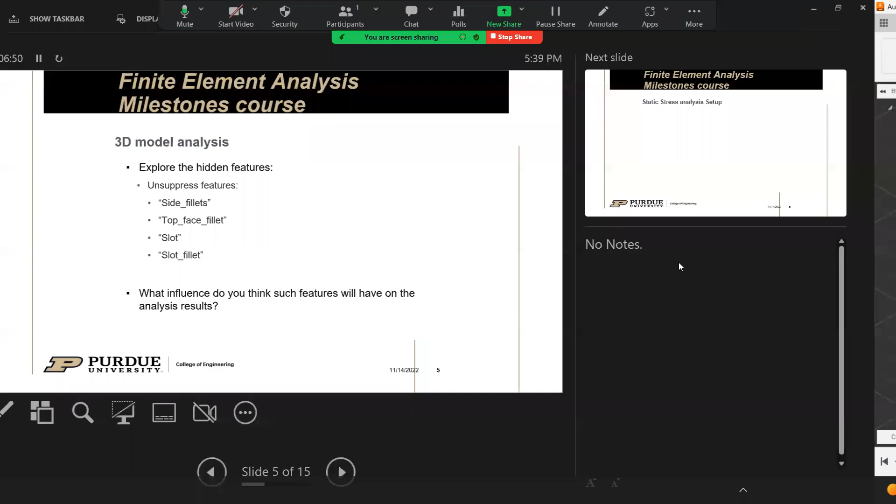Okay, so what influence do you guys say? Well, obviously by unsuppressing those features—if you guys see here, one of them actually gets rid of material from the center here.

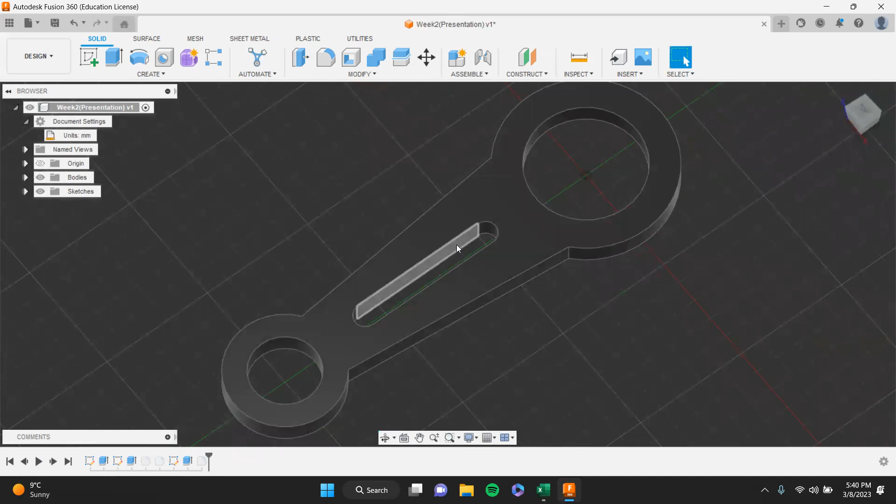You can see it actually negatively extruded from the part, and that's because, as we will see, this part alone has a very high safety factor—really high, to the point where Fusion is like, hey, you don't need this much material, you don't need this to be completely filled. We could have a hole and save some material, save cost in turn, and the part would work just fine for what it's supposed to do.

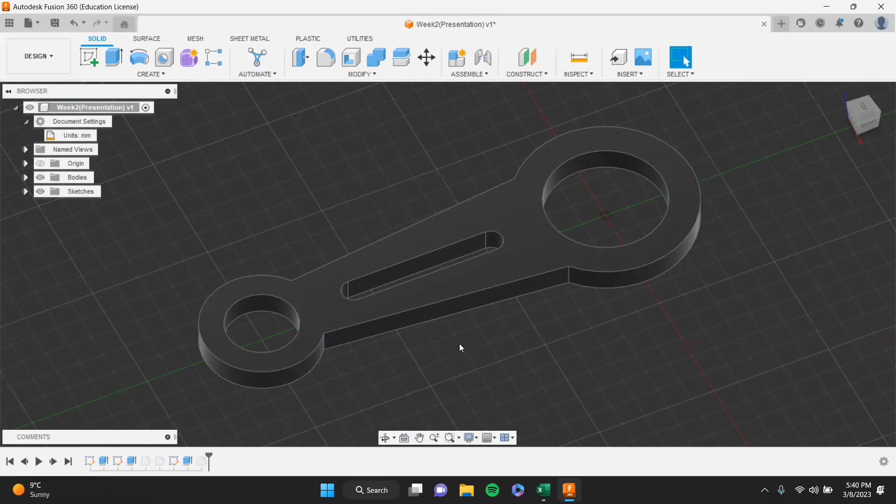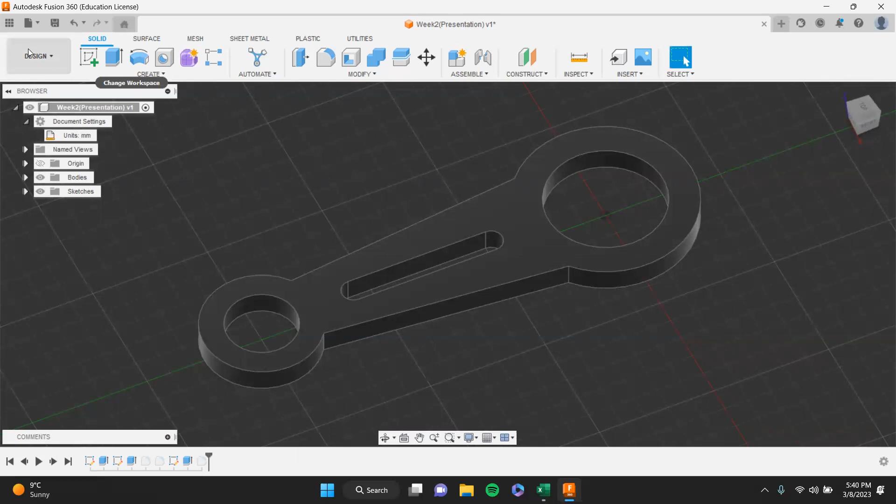That's the main purpose. So now that we have our part, we're actually gonna start with FEA. It's exciting now. First thing we want to do is switch from design to simulation. So when you guys are using Fusion for CAD, you're always on design here. In FEA, we don't really touch on design.

We go down here to simulation, and you can see a color gradient close to what Bernardo presented last week. Click on that—so again, it's just up here, design, and over here, simulation. Click on that.

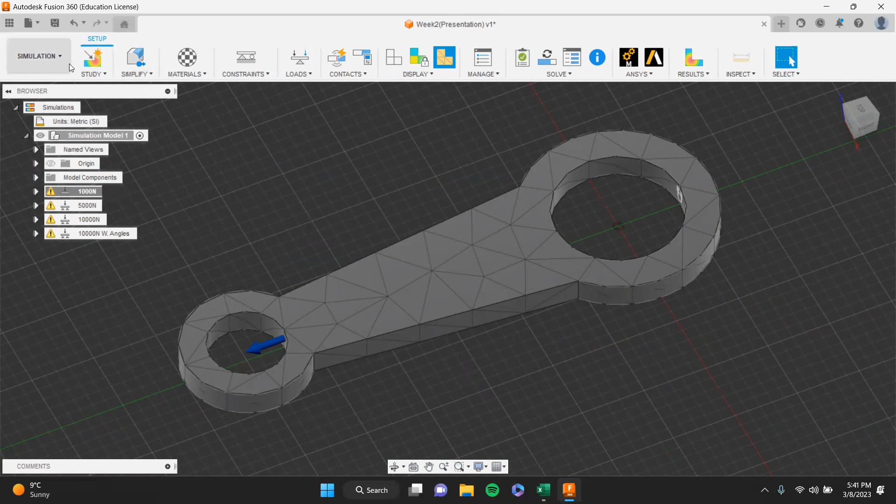Don't mind the warnings here, but you guys should see not this screen actually. Let's just create a new study. You guys would see something like that.

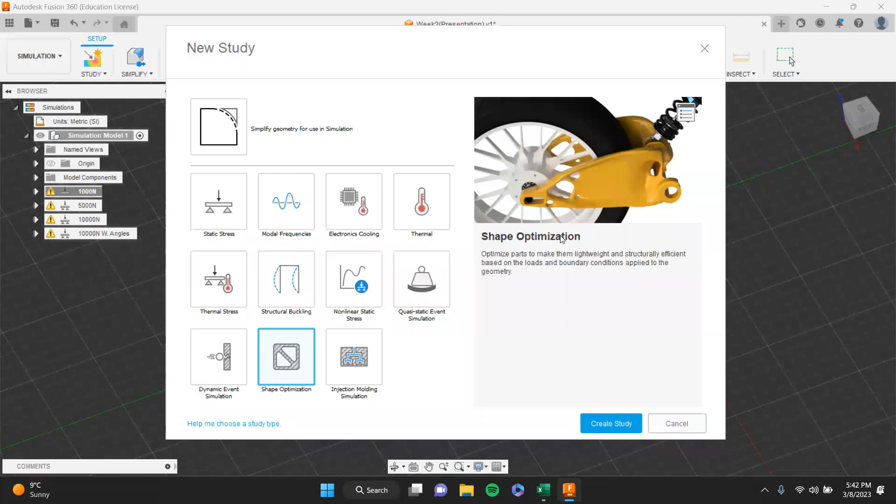So for this FEA course, we are just going to be focusing on simplify, static stress, and shape optimization. But simplify and shape optimization we're going to start later in the weeks. You guys can see there's a lot of different ones, but we're not going to touch on any of these. The basic one is static stress. Basically, if you know how to set up a static stress analysis, you guys are on a good track to set up other types of studies here.

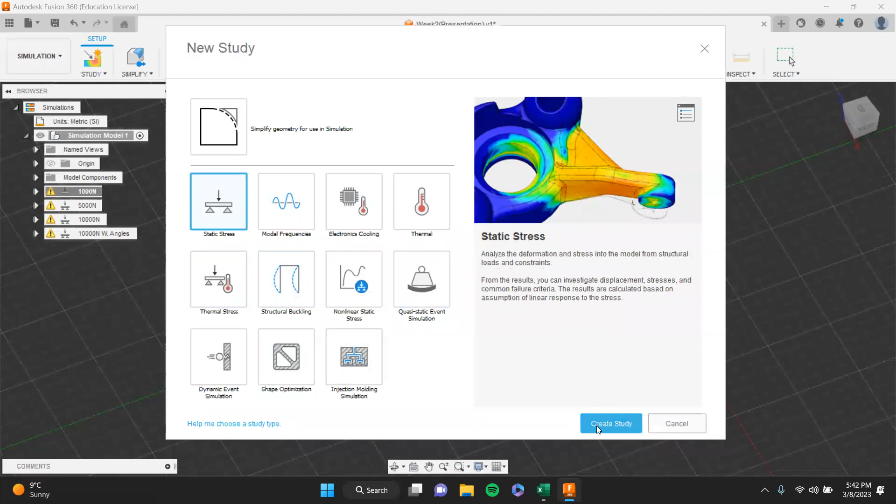So we're gonna create a static stress here. Click on that. Yes. Thank you. All right, we're gonna go back here.

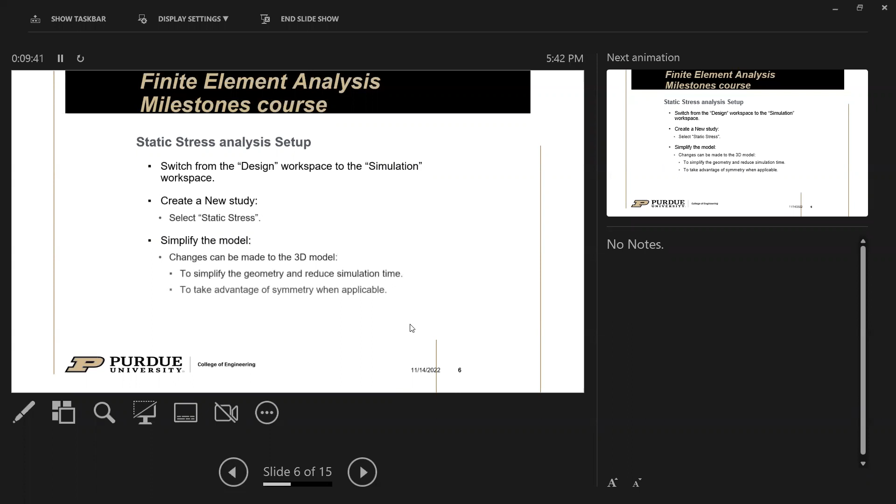This is what I told you guys, this is what the simplify does. So I'm gonna go back here. Here you guys can see simplify right next to the study. I'm just gonna explore that for now. You guys can see a very similar sort of screen to what you would have when you're in design here.

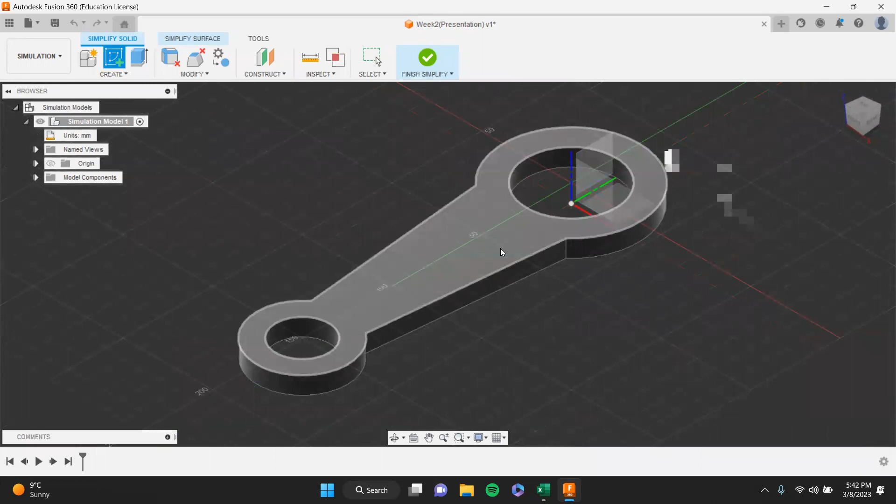So I'm just gonna try something out here. I'm just gonna create, say, a rectangle down here. Just finish sketch and extrude that negatively. So now we have a hole here.

One thing to note about simplify is that when you finish simplifying here and go back to your design, this is not gonna be there. This hole is not gonna be on your original design. Its main purpose is just for you to edit your part a bit and change up your simulation or study, so I'm not actually gonna do that.

Okay, we're back here. So it's just to temporarily modify your model. And when you guys go back to your design tab here, you're not gonna see the change.

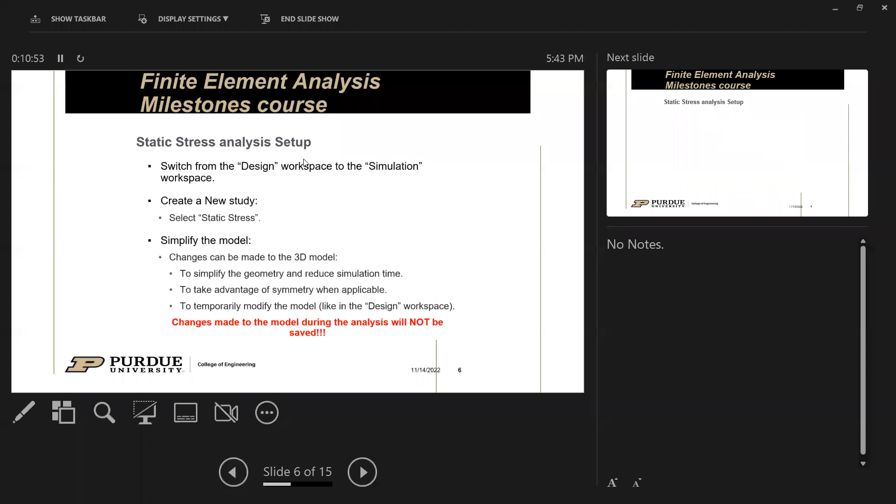So next, the next thing we'd like to do usually when creating a study is to apply our materials. To do that, we go to the study material section. Right now you're at same as model, now we'd like to change that. So I'm going to show you guys how to do that.

First, just drop down here. We'll need to go to study materials here again. So yeah, you'll be here, click that arrow, you'll see study materials. Two ways you can edit it: through the pencil here, or you guys just right click study materials, and you guys see same as model.

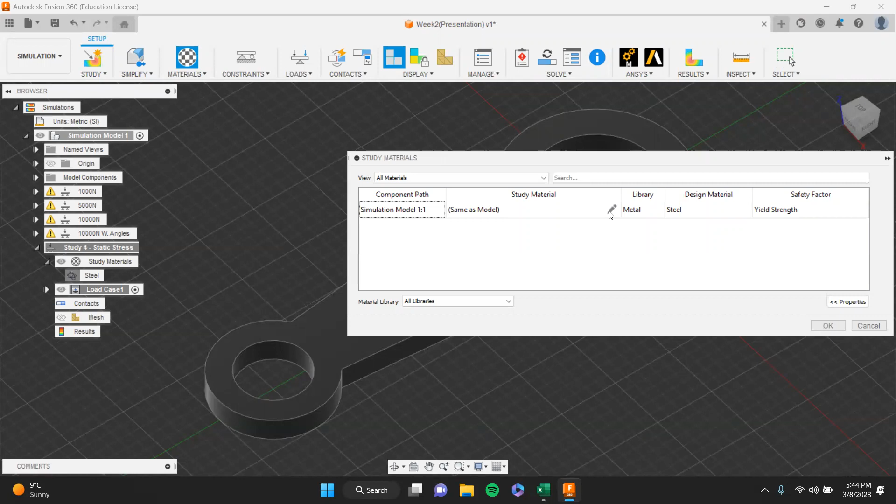For our studies, we'd like you guys to change it to aluminum. Sorry, I have a bunch of them, I was trying out how to create custom materials, so don't mind that. But you guys should have one aluminum, just pick that and click OK. And now your study material should be set. You guys have any questions up until now?

Cool, all right, I'm gonna go back. Next thing is your safety factor. So this includes a lot of engineering properties that I don't really... I mean, it's important, don't get me wrong. Let's just not. Give me a sec, I forgot how to get here.

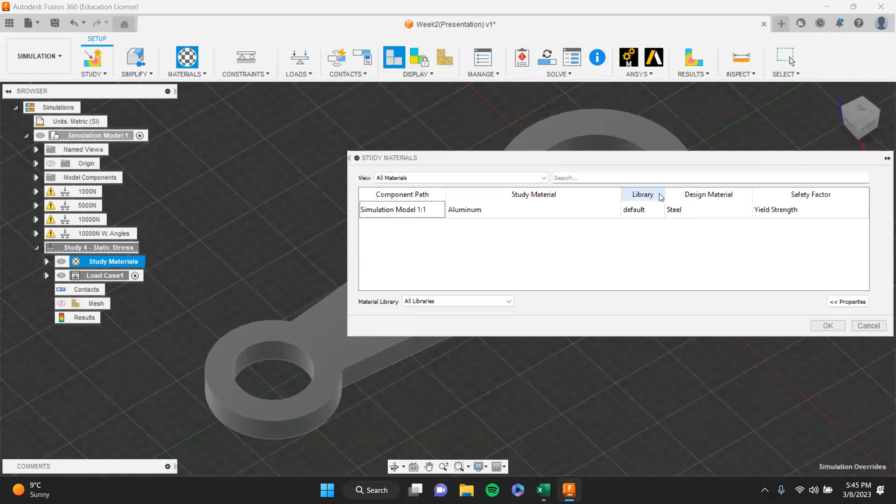It's in study materials. Yes, here, yeah, okay, here. Nice, yeah, so that's how you look at your different properties for the materials you pick. We're not really gonna take any of these into account. All we know is we're gonna use aluminum, so that's all you guys need to know. Once you guys are done with that, let's move on.

So the next step of creating a static stress analysis is to apply your constraints. Because at this point, what Fusion sees is this part is floating in space. Let's take this grid out, it's just floating in space. Fusion doesn't know what to do with it, so we tell Fusion what to do.

First thing is constraints, up here is the constraints tab, and we click, there's a lot of different ones. Just gonna go the basic one, you can just click on that. And we're gonna use a fixed constraint. There's a lot of different ones you could pick from, but we're just gonna use fixed because it's the most simple one.

And we are going to fix this inner hole here. So what this is telling Fusion, you can see I have all three axes selected. This is telling Fusion I want this inner hole to be fixed with respect to the X, Y, and Z axis. I don't want this inner hole to move at all. That gives the foundation for our static stress analysis. So I'm going to hit OK there.

I'm just going to hide the origin. So far, everybody good? Yeah? Cool.

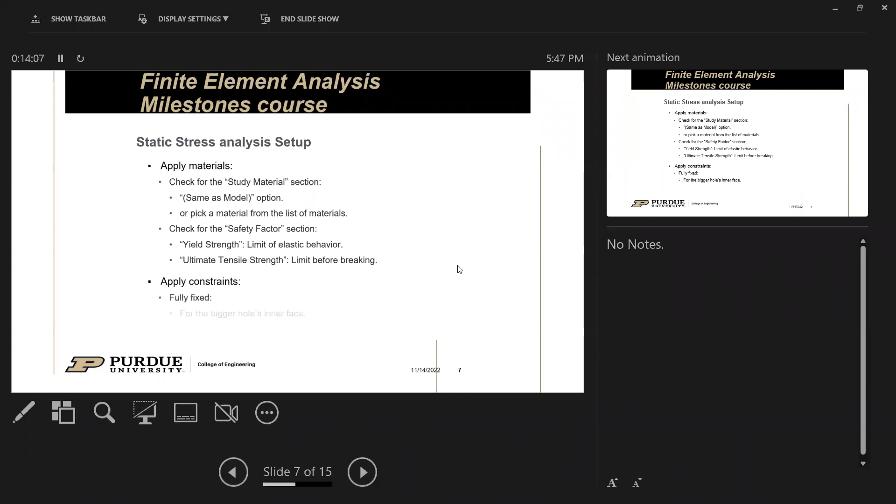Alright, so next thing you want to do usually is apply your loads to your models. And for this one, we are going to apply a force load. So select the structural load, and then select force from the drop down. You want to select the inner face of the smaller hole.

And it's a lot of different things, so I'm just going to go through this first. We're going to edit our angle, our direction type, and we're going to set a magnitude. So I'm going to sort of give you guys a demonstration on how to do that.

Now that we've made our constraints, next thing we want to do is your loads, which is up here, right next to constraints. Click on that. So again, on the drop down, there's a lot of different loads you guys can pick. We are going to stick with force for this one.

Now it's asking us for a target. Earlier, we constrained our inner, like our big hole. Now we're going to apply our load on our smaller hole here, right here. Now you don't want to click here or here. Click on the face, the inner face of the hole. Click that. Now there's a lot of different things we could change here.

We could change the angles, change the direction reference with the direction of the arrows, or we could change the magnitude of our force. We want it to be 1,000, so you guys can set it at 1,000 newtons. Oh, where's this not working? There you go, 1,000 newtons.

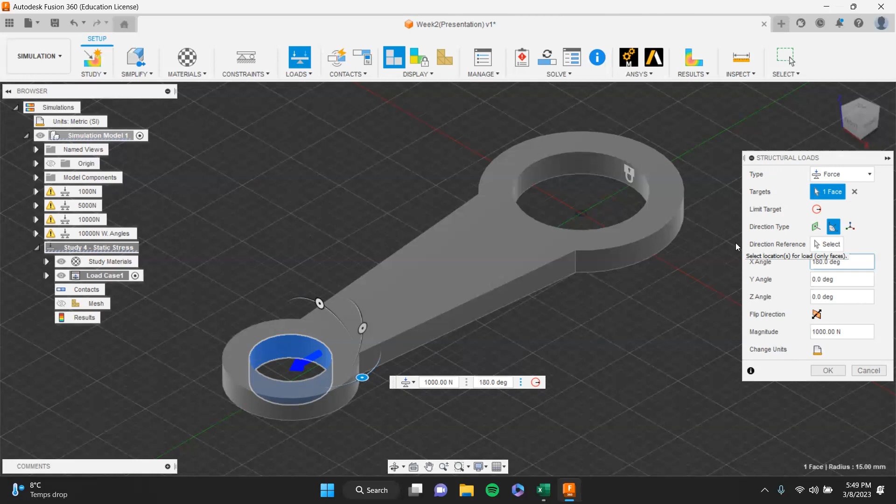Everybody good? Cool, I'm gonna go back here.

So next thing we want to do for FEA static stress analysis is to generate the mesh. So earlier last week, Bernardo talked a bit about meshing, and we're gonna get a lot deeper into it next week. But right now, we are just going to create a very basic mesh here.

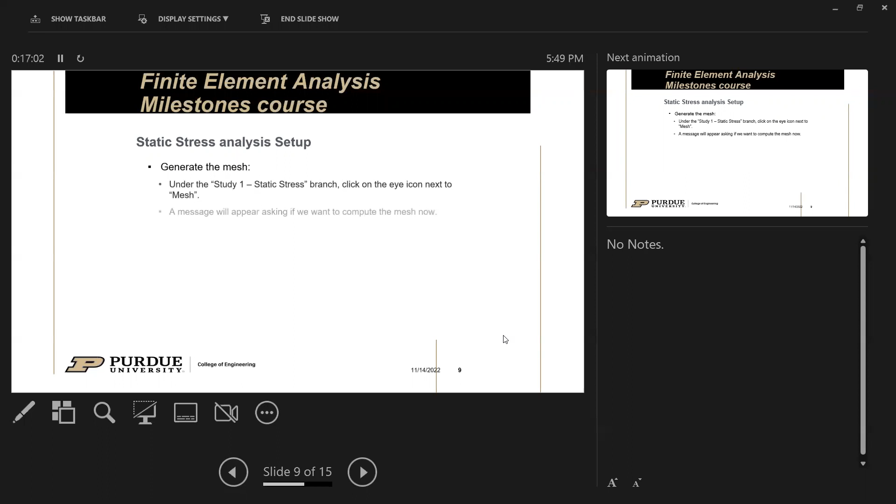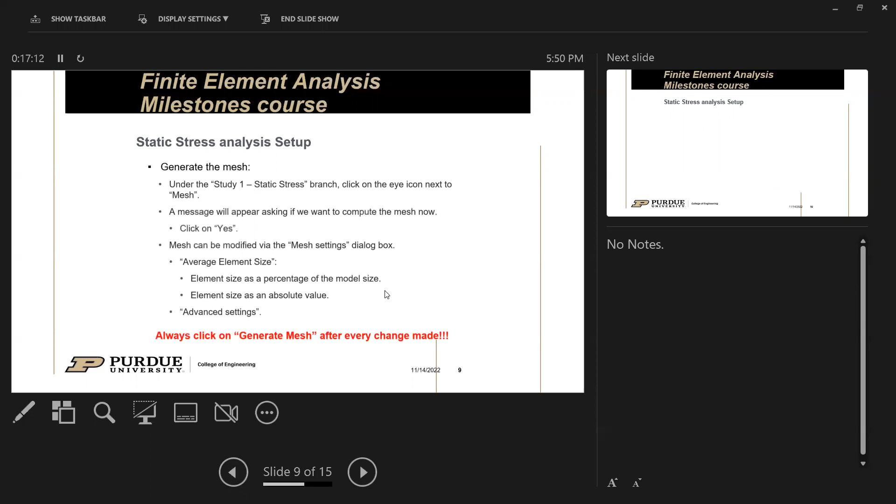And here is sort of a very general step by step on how we can edit the mesh. First we want to go...

Okay, I have a question for you guys. Do you guys prefer if I read it from here and you guys do it yourselves, or if I'm over here and I sort of just talk about how to set things up? The latter one? Cool. All right.

So there's a lot of different ways that you guys can get to your mesh. First one's over here, second one's over here, third one is over here. It's over here at settings. All right, I'm gonna go through each and every one of them.

First one, you could go here in our drop down. So if you guys are seeing this right now, click this arrow, gets you to this drop down, and you should have mesh right here. And then you want to go to edit here. And now you guys are at this mesh page, right?

So we're gonna get a lot deeper into this and what each of them means. But as of right now, I want you guys to make sure you guys are at model base size and at 10%. Now, how do you guys know if you guys are at 10%? You guys just hover over this arrow. If you hover over it long enough, it tells you what percentage you guys are in. So that's the first way.

I'm gonna hit X here. Next, another way you guys can do things is, sorry, you go to settings.

At settings here, below general is mesh, and it's exactly the same interface we saw earlier. Doesn't really matter how you guys get to this mesh setting, as long as you know how to get there, you're fine. So go here, click OK. That's one way you guys can do it.

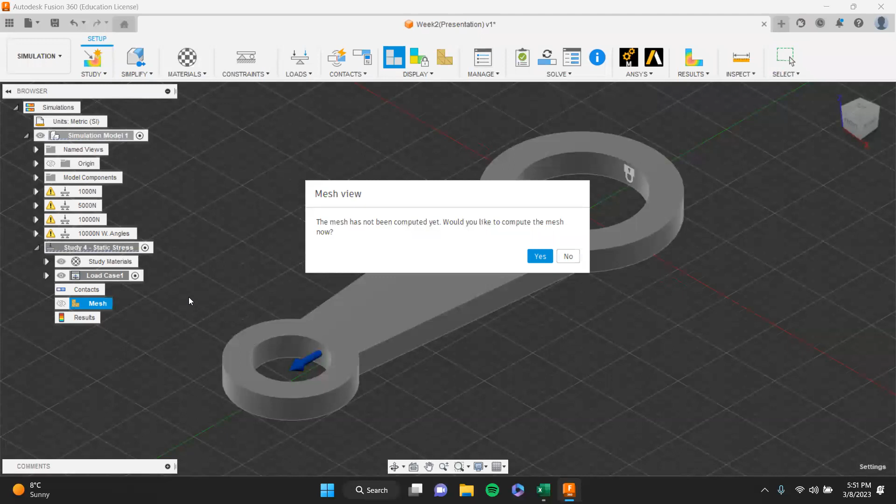Another way, if you don't really care about your mesh, you can hit this eye, toggle this eye, and it's gonna tell you it hasn't been computed yet. Just hit yes, and Fusion's gonna put like a generally rough, simple mesh. So this is what it looks like. Is this what everyone is seeing right now?

Cool. So we're gonna go next.

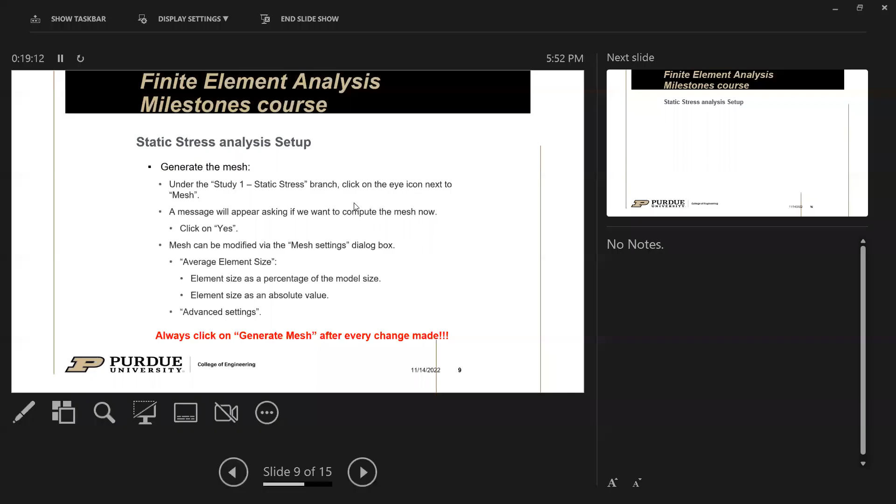One thing I want to mention is Fusion has a tool that can help you guys out a lot in seeing whether or not you set up your studies right, and that's called the pre-check tool. Basically, when you set things up right, you'll see a green check there. If you set things wrong, you'll see a red error, and I'm going to show you what that looks like. The pre-check button is right next to solve, right next to settings over here.

And if I click this now, you guys can see, from here, we can already see it's green. There's a check here. I've set everything up. Fusion's telling me, all right, we're ready to solve, but I'm just going to delete something here.

See, if I take that constraint out, Fusion's not very happy with me now. It's telling me, hey, I don't understand what you want me to do. Yes, there's a load, but there's nothing fixing it to the ground. If I apply that load, our model's just gonna move along with it. So that's basically what Fusion is telling us.

And depending on what you forgot, Fusion will give you a different warning. So I'm just gonna apply that constraint back here. There you go, Fusion's like, all right, you're ready.

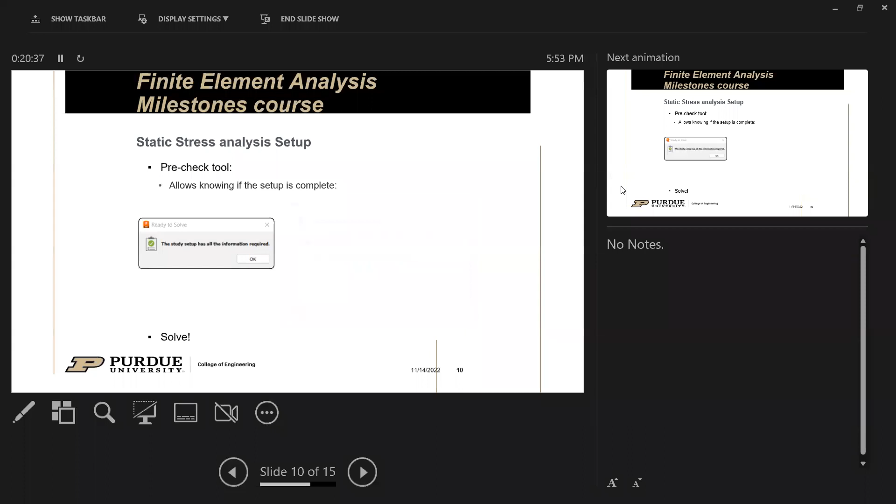So that's that. Okay, so now we're going to actually get into solving our model. Right next to pre-check is the solve. You click on that and click on your study.

You guys shouldn't be seeing any of the other ones. Just you guys should be seeing something like this. And you just hit solve one study like that.

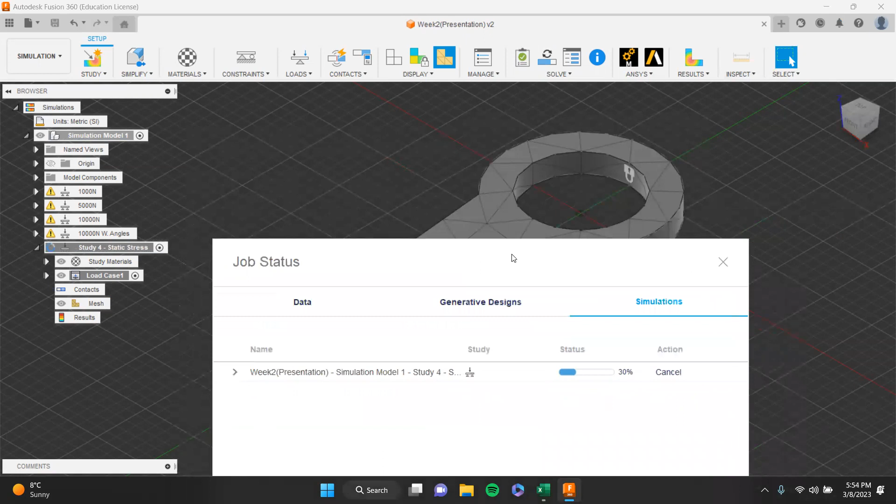And it could take like 2 to however many minutes you might need Fusion to run the study. In the coming weeks, we'll realize that the speed at which Fusion solves these is completely based on your mesh. Right now we have a generally rough mesh, so it shouldn't take Fusion that long. But as we get to smaller and more defined meshes, Fusion will take a lot longer to solve the studies, but we don't have to worry about that for now.

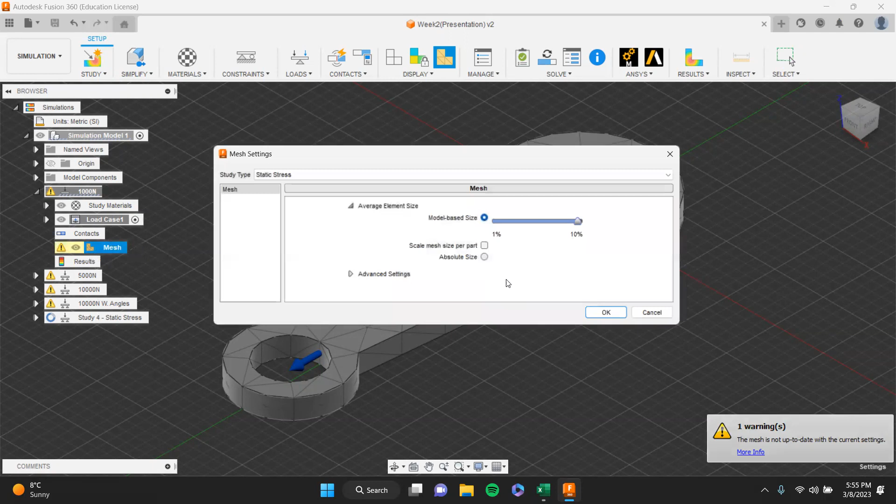Yes. After pre-check, once you're done with your mesh, give me a sec, I'm just gonna update my mesh here. Cool.

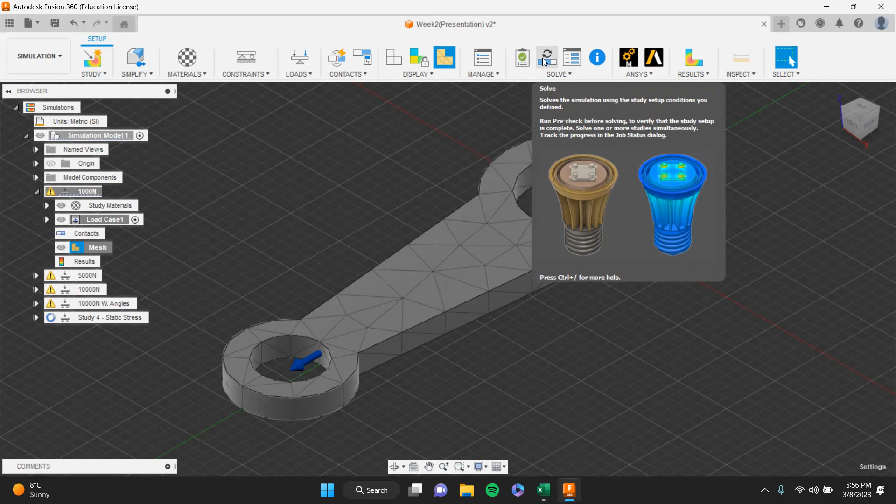After pre-check, yeah, so when you have a green already, if you see that your pre-check's a green tick mark here, that means you're all set for the next step of the FEA analysis, which is to actually solve this study. So that's exactly what we did earlier. We hit solve and we just solved it.

Another way you guys can get to solve is through here, simulations. You can right click and there should be solve down here. But that's hidden, right? I mean, this is way bigger, it's way easier. It has solve right under it, so that's probably the easier way to do things. Just go here and hit solve.

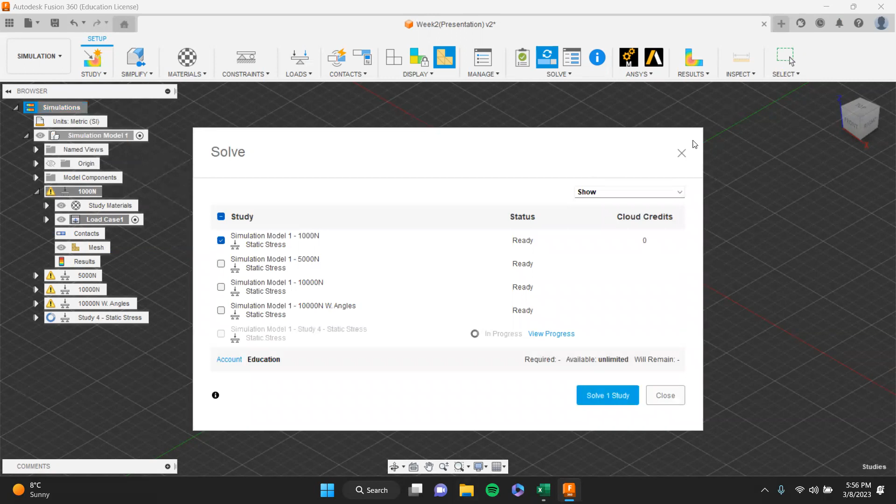But yeah, by this point, it's a waiting game, just waiting for your studies to finish. So I'm gonna go back here.

One more thing while we're waiting, we can change the names of our studies by double clicking here. I'm just gonna call it 1000N again.

All right, so as you will see, once your study is done, the status will show complete and you'll see a results detail here. First thing you guys will see is... let me make this bigger actually, because... cool, yeah, a lot better.

First thing we have is the safety factor. So there it says actual minimum safety factor of 15.

Now earlier last week, Bernardo talked about how in industry they usually look for a safety factor of 1.5. A safety factor below 1 means that whatever stress or force you're applying on your model, if you actually did that in real life, your model's going to break. So a safety factor of 1.5 means your model can sustain whatever stress or force you're applying on it.

Next thing is Fusion has some recommendations. Very general recommendations, but nevertheless good ones.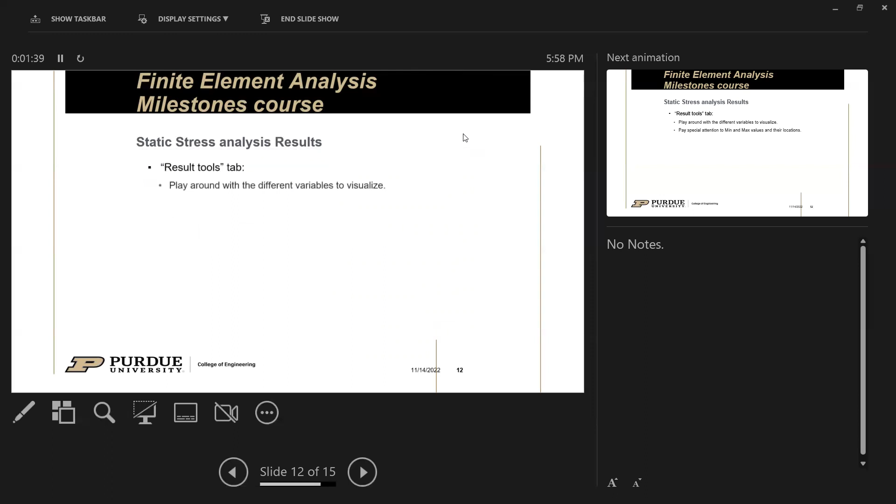All right, um, yeah, so once it's done, I'm just gonna go over these slides, and once the study's done running, I'm gonna go back to Fusion and show you guys what exactly each of these are saying.

Okay, so yes, that is all. So once your study is actually done running, there's a lot of things you could do with it. First things first is you guys can choose what you want to visualize.

There's a lot of different factors you can pick from: displacement, safety factor, as well as stress. So you can see how each component is affecting your model.

And the next thing that Fusion allows you to do is observe the deformation of your model as it goes through that stress. There's 3 modes: first is undeformed, which is basically what your model looks like before you apply the stresses on it; second is actual; and third is adjusted.

Now, by default, when these studies are done running, the results you'll see are adjusted. This is just because, say, the study we just did earlier is a force of 1000 newtons, which might not be a lot on our model itself. So the actual displacement could be like times 10 to the negative 4 millimeters.

So it's really small. And if we keep it at actual, we might not be able to see the deformation at all. That's why people usually use adjusted, just to give them an idea of how their model would deform.

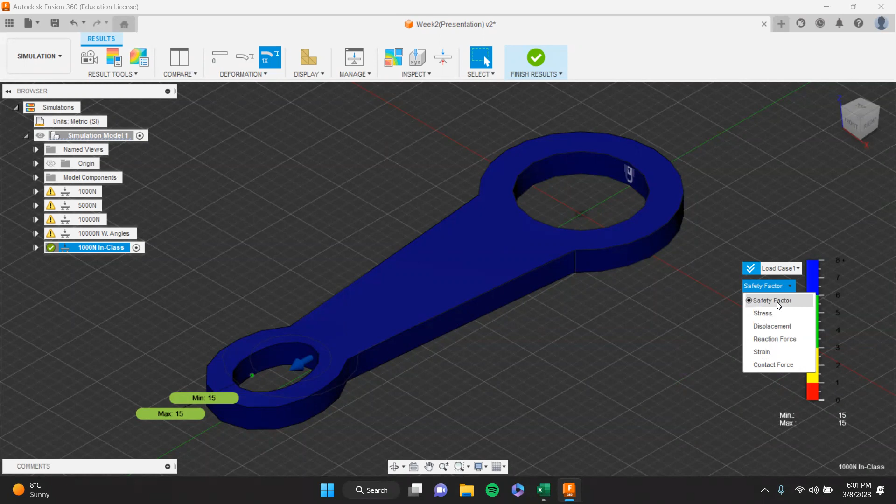And like I mentioned earlier, here's the deformation. We have undeformed, actual, and adjusted. Now, as I mentioned earlier, it defaults to adjusted. As you guys can see, let's go to stress actually. Yeah, that's better.

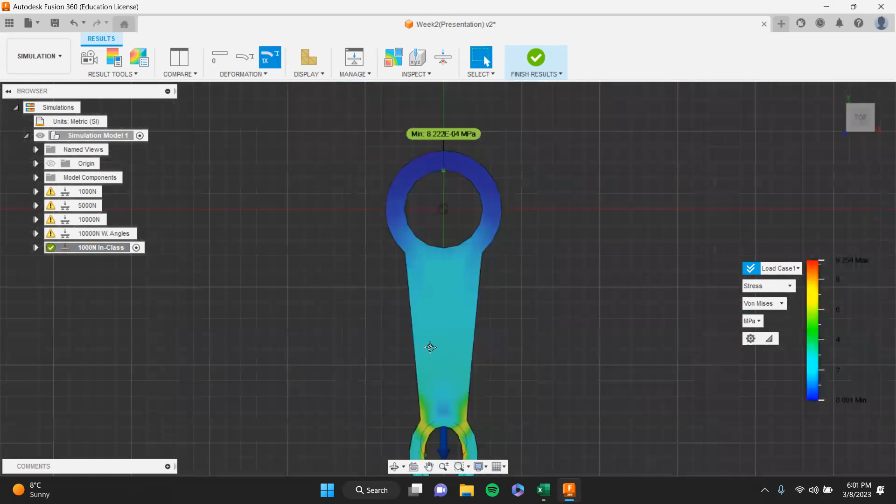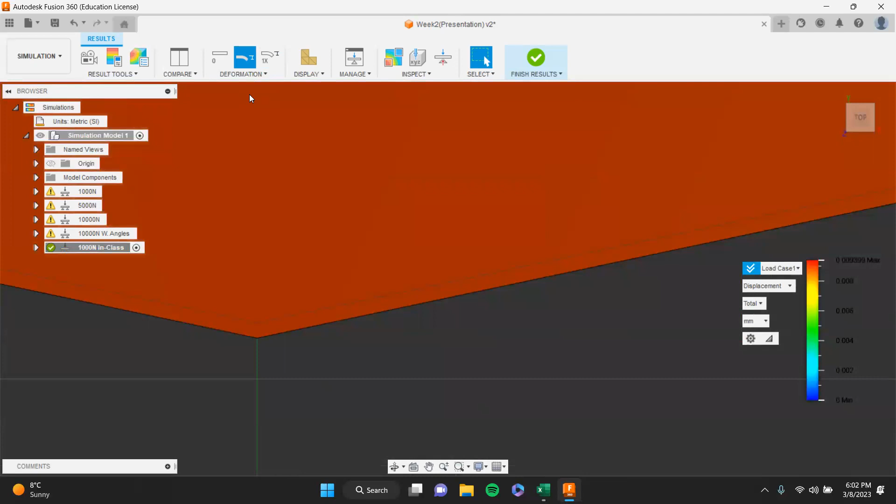It looks like our part actually moved a lot, right? If we go here, we can see it's actually a very small displacement. If we go to actual here, we can barely tell the difference - we have to zoom in a lot. There, that's our displacement. That's why we use adjusted, because honestly we wouldn't be able to tell if we kept it at actual - you wouldn't be able to tell our model is deforming at all. So if we want to get an idea of how our model would deform if we increased the force applied, that's one of the main purposes of adjusted.

Another thing you could do is animate how your model is deforming, which is pretty cool. So yeah, three things: displacement, stress, and safety factor. When you're on stress, by the way, in this course we're going to focus on von Mises stress and keep your units as megapascals.

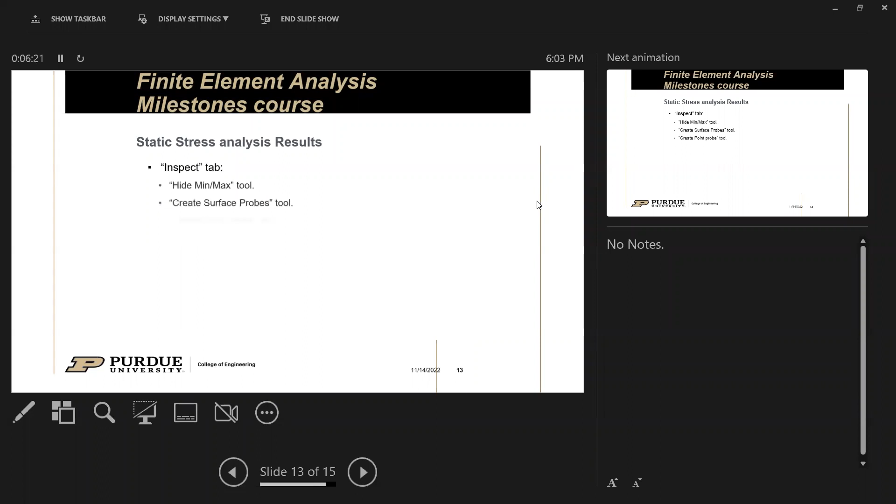So yeah, we're done with that. Next thing we're gonna get to is - oh, I forgot this - yes, okay, this is another thing we could play around with: the inspect. I don't really go through these, but if you guys are tired of looking at these, you can just hide those.

And then if you guys want to look at how a specific point within your part is affected by the stress and how it deforms, you can put a point probe here. And the last one is reactions - I don't really, we're not going to get into that.

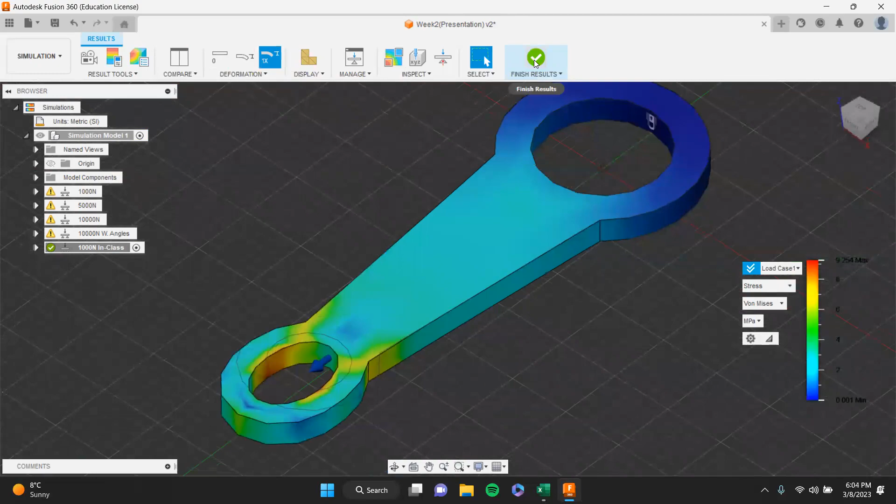What we want you guys to do now is change the values yourselves and make your own studies. So we're gonna create 4 different studies now. If you guys created that 1000 Newton one, that's one study - you just have to make 3 more.

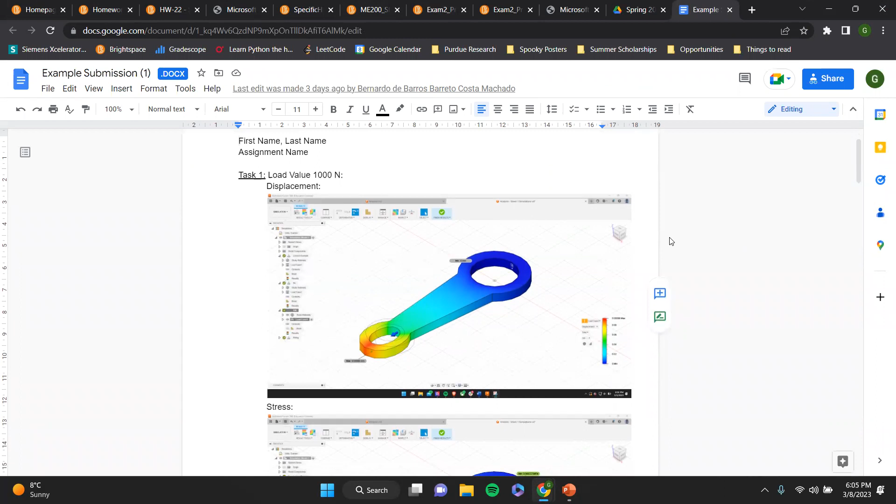A screenshot of your displacement, and we want the entire screen, by the way. So displacement, the stress, and the safety factor - those 3 components. And since you guys are doing 4 studies, we're asking for 12, so 3 from each study.

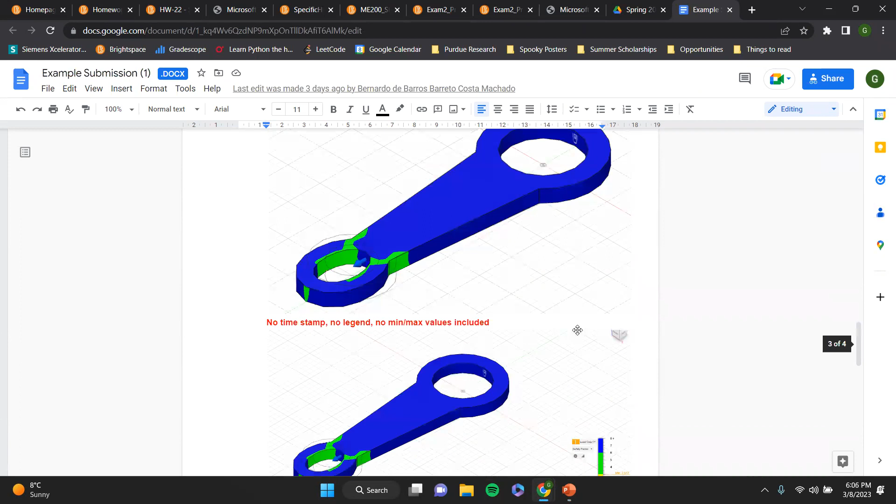Okay, here's some ways we don't want you guys to do it. The issue here is, I mean, you could have asked someone else who took this course to send you the screenshots, which I don't know why anyone would do. But per milestone's instructions, they would like the entire screen where they could see the dates, see the times, and see your entire screen basically. So this is one way we don't want you guys to do it.

So another way we don't want you guys to do it is, again, we'd like to see the minimum and maximum values. So please do not hit that - just show it, don't hide it. We don't mind, we want to see it actually.

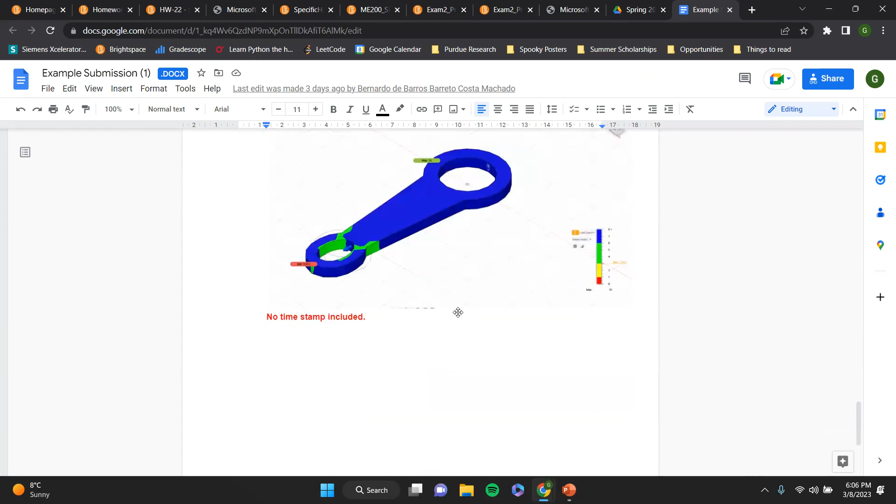And the third one, again, no timestamp. So something crucial is we'd like to see the date and time so we can actually see you guys - you guys are the ones that did it.

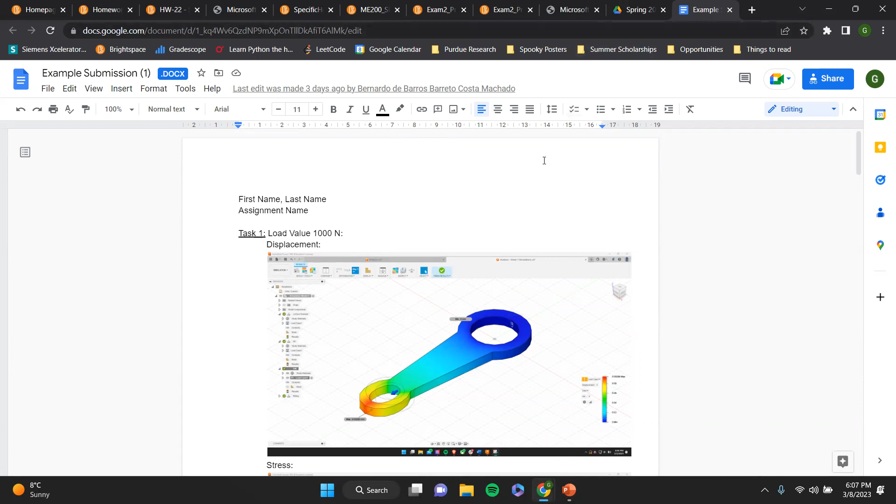The maximum stress value could differ slightly, we're not asking for pinpoint accuracy. The biggest part of this course is we want to see that you guys are able to create your own studies, and show us stress, safety factor, and displacement. That's the biggest target we have within this course.

So yeah, I'm gonna make this full screen so you guys can have a better look.

So if you guys can do that already, you should be in prime condition. The first one we're asking for is the 1000 newtons, which we just did. Second one is 5000 newtons, and third one is 10,000 newtons. Now this fourth one, we're asking you to create a new study, so this is four separate studies. We want you to edit this 10,000 newtons one and add another angle to it.

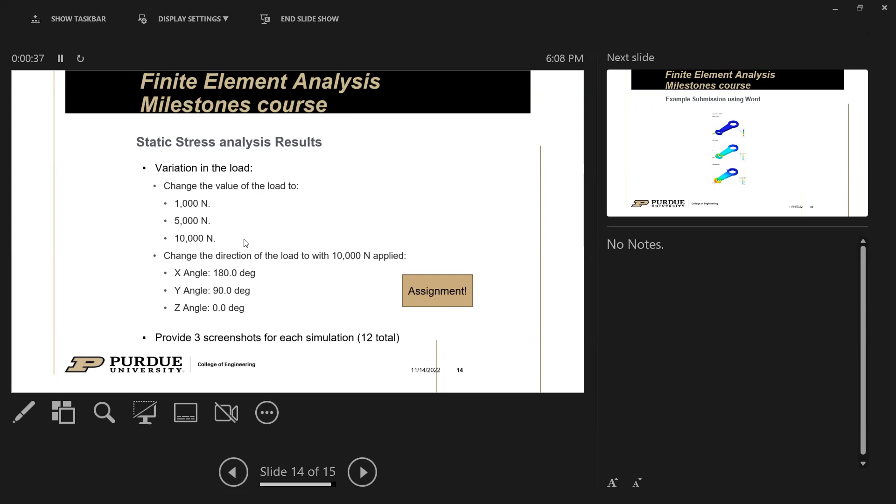This time in the y-axis. So I'm going to show you guys how to do that. Something helpful to you guys is instead of creating a new study, reconstraining it and putting new loads to it, one thing you guys can do is right-clicking here and clone study.

Instead of hitting this and creating a new study and then reconstraining it and adding new loads to it, what you guys can do is right click here and clone study. This makes things a lot quicker because when you clone study here, I'm just gonna close that.

Of course you need to generate your mesh again, but why it's better, I think, personally for me, is because you have your constraint there, and if you just want to edit the magnitude of your load, you guys can do that. So adding 10,000 is as easy as that.

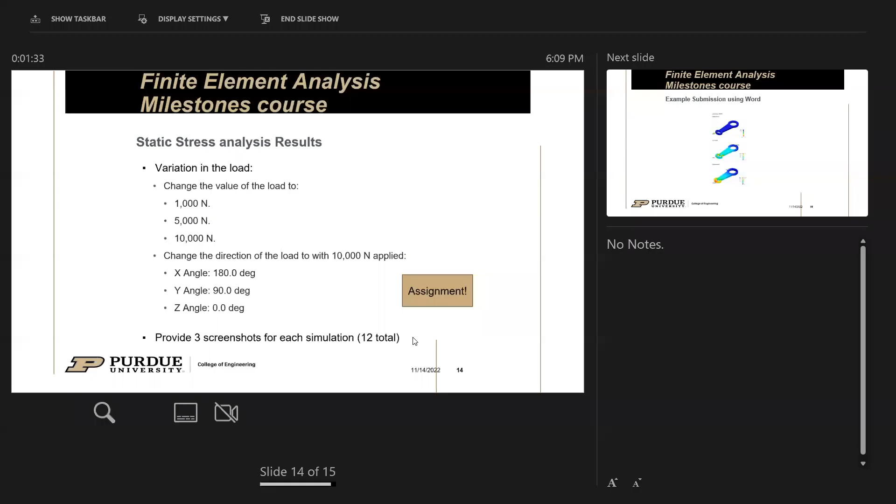Now again, the fourth one asks you to change your angle to 90 degrees. So we just want to change this to 90, which is basically an arrow pointing down, right? Again, Fusion might put your arrows in default in weird conditions, so the main idea is we want your arrow to be pointing down. If you guys have that and you're at like 90 degrees, we don't mind, that's just the main point. We just want it to be pointing down.

So yeah, I'm gonna go through how to create a study one more time, and then you guys should be good. I'll walk around if you guys have any questions.

So you want to hit study here? Oh, let's go from the beginning actually. So we start design here. This is the normal Fusion interface you guys are probably used to. Up here, you go from design down to simulation.

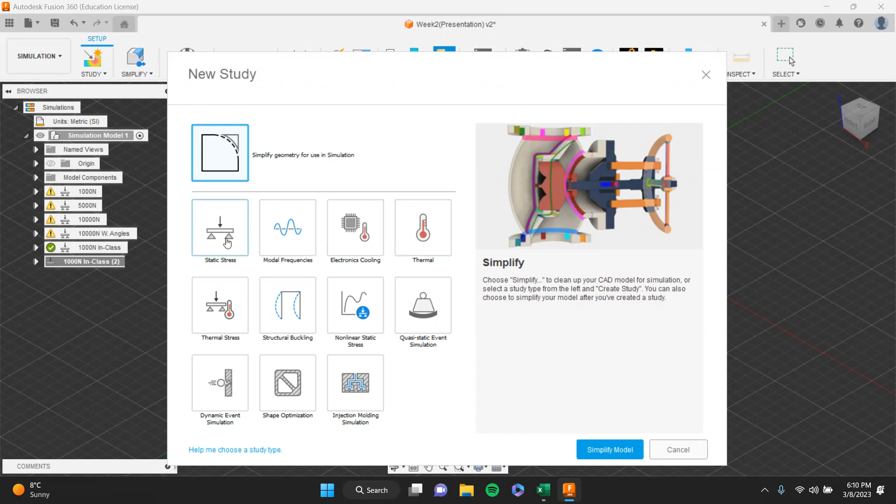And when you're there, you probably won't see the screen you expect. You'll probably see a screen like this asking, all right, welcome to simulation, what do you want to do? For this, we're going to use static stress. You can double click on that or click create study. I simply double clicked earlier. One thing you guys can do again, double click and change your study.

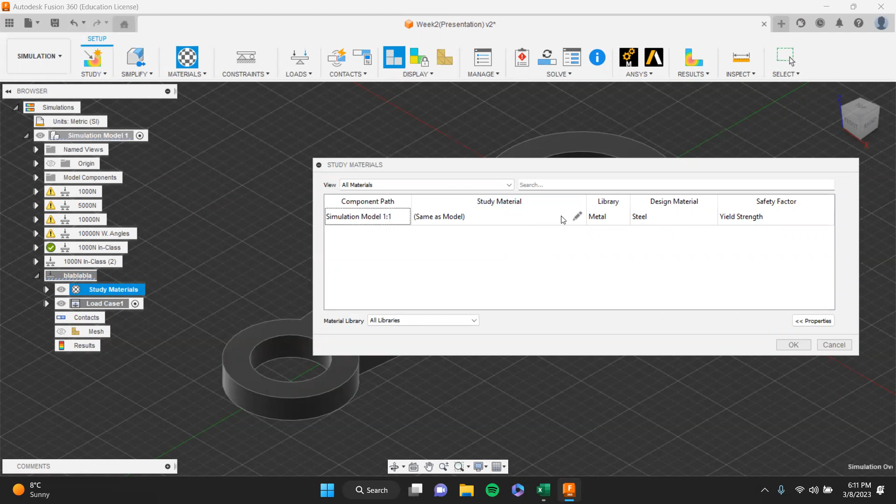And then the first thing you want to do is your materials. By default, it's going to be same as model, which is steel. We actually want to change this now to aluminum, right? That's the material we're going to use for the rest of the course.

Next thing you want to do is add constraints to your model. For this class, we're gonna follow 3 weeks. In the weeks to come, we're gonna have the exact same constraints and loads, so try not to get bored. We want to constrain the inner circle here, the whole of the inner circle, not the edge, but the face inside. You want to make sure that all 3 axes are highlighted and your structural constraint is set at fixed. Once this looks right, you're gonna hit OK, and you guys should see a lock mark here.

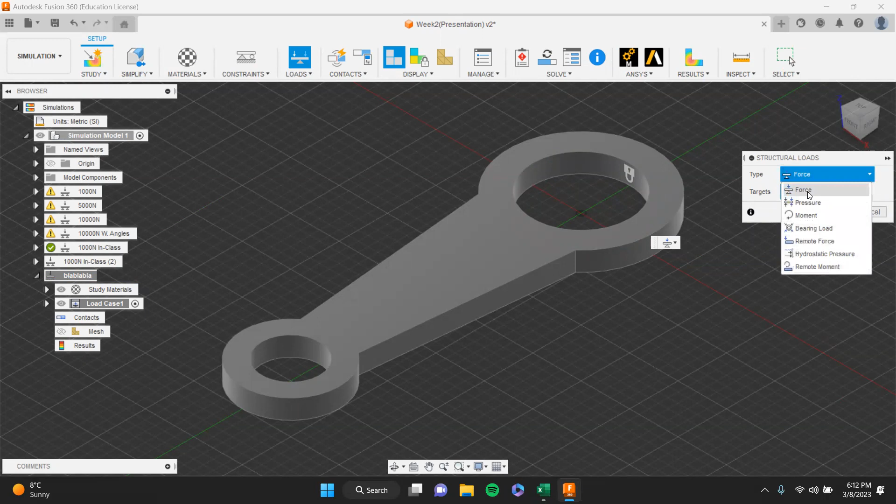That's how you know if you did it right, if there's a lock mark. If you have any axis that's not highlighted, it's gonna be an unlock mark, which is Fusion trying to tell you that our part can still move. A lock mark basically tells us that our model's fixed now. We're ready for the loads, and you guys can find loads right over here on top. Just click on that. There's a lot of different types of loads to go over, but specifically we're going to go with force for this course. We're going to hit the inner face of the smaller circle now.

Again, not the edge, the inner face. Now the arrow's pointing towards the lock, but we wanted to point the other way. Two ways we could do that: edit the angle here to 180, or

you could rotate by dragging on this. Sorry, again, 180. That's good. Or what you could do as well is hit direction, right?

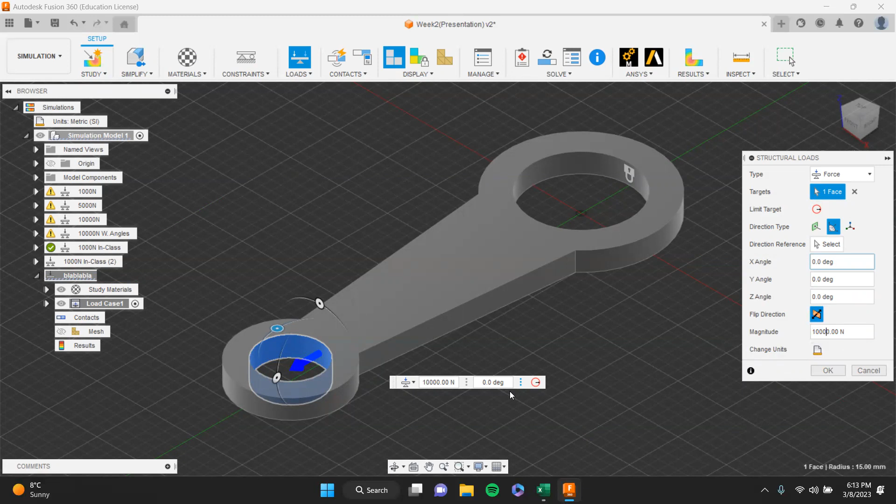Either way works, and then that's how you set up your magnitude. You could input here or here, doesn't really matter. We're gonna hit OK, and then next thing you want to do is generate your mesh.

Again, two different ways. You want to hit the pencil icon here to edit your mesh, or you go up to your settings and go to mesh. Either way is fine. You want to make sure your mesh is a model-based size at 10% for this.

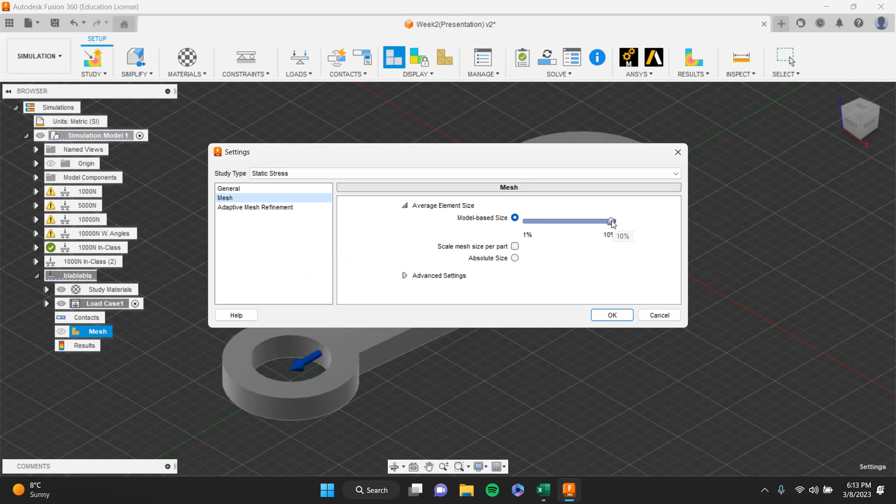I'm gonna hit OK. Once you've done all that, you guys should see a green check here. This is your pre-check telling you you're ready to go. If you guys do not have a green check, you can review in the recording what you did wrong, or if you're here in person, raise your hands. But once you're done with that, you should be ready to go.

Two ways you can solve: hit the solve here. Fusion will automatically select whichever study you're on right now. But I have other studies here, and you could actually select multiple studies to solve simultaneously. We're gonna get to that next week. But you basically hit solve for one study or however many studies, and you wait.

And then once you're done with your studies, this should be the screen that you guys are... Cool, so once your studies are done, this is sort of the screen that you'll be introduced with.

And give me a sec here. There's one thing I want to see. It's not here. Is it here? Nope.

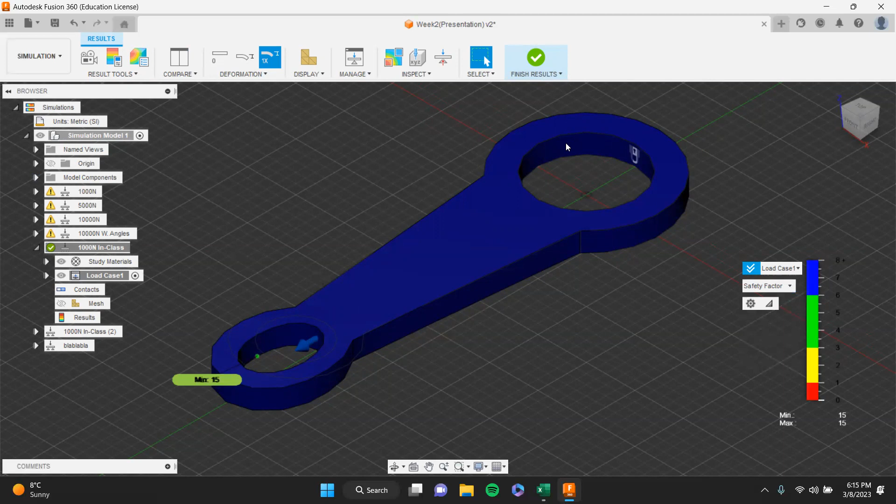But yeah, basically we want you to screenshot this. So this is one good screenshot, the entire screen. Then go down to stress, screenshot, and switch over to displacement. That's 3 screenshots. You have 4 studies, so do that again 3 more times. Compile that in a Word document and submit it to us.

Do you guys have any questions? Yes. Okay, Jordan will be out to help you.

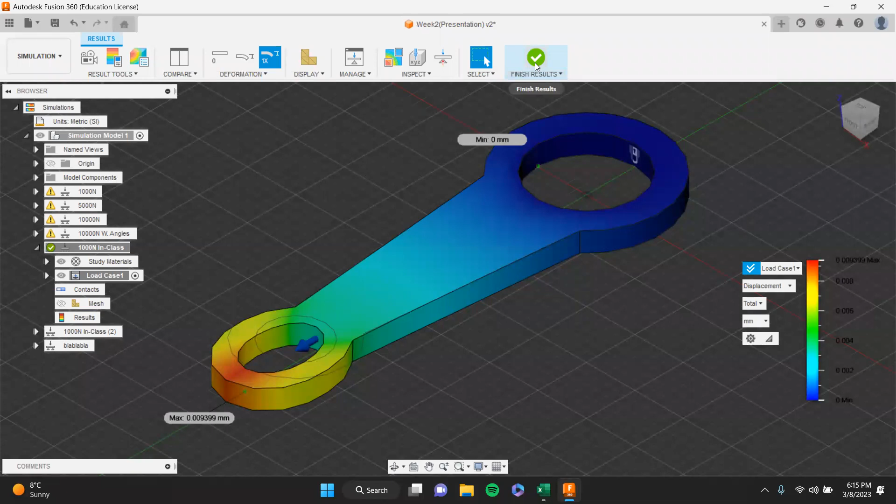Okay, so I'm just gonna go back here, and just let me know if you guys need any help. Sorry.

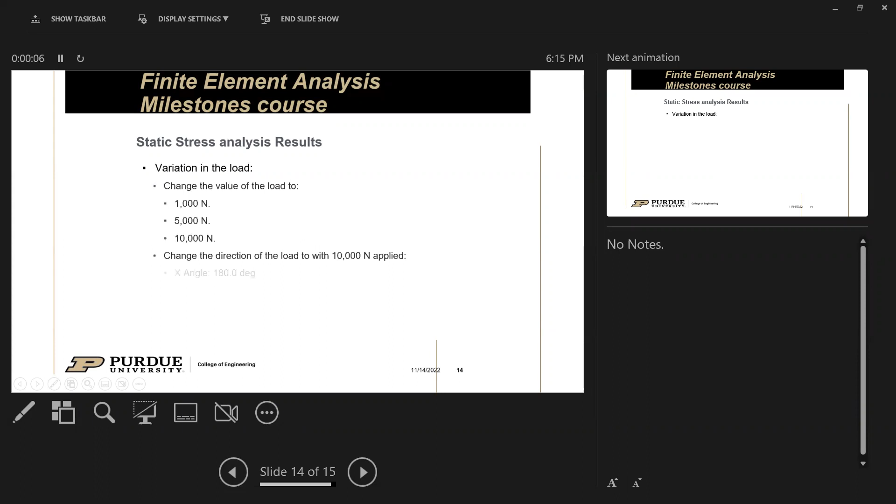Yeah, so again, 1,000 newtons, that's one. 5,000, that's one. 10,000, that's one. And then 10,000 plus the 180-degree angle at the x-axis, that's another one. Total of 4, three screenshots each.

Yes? That's completely up to you guys. It's a lot more simple if it's suppressed, but if you want to try it out for yourselves, we're not stopping you. So it's your choice, basically.

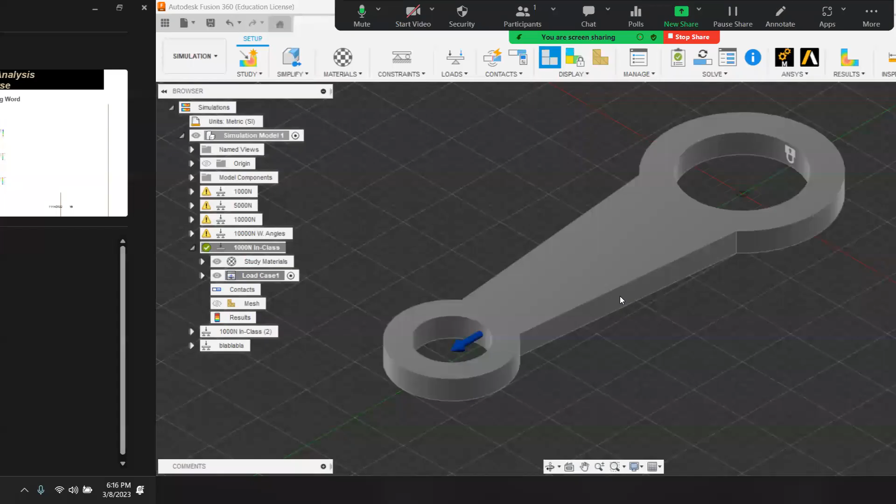Yes. Oh, yeah. Yeah, okay, that should be fine. Um, so let me go back here.

So if you're on simulation right now, I'm sorry, we want you to go back to design. Let me know if you're already on that screen. Yeah, okay, cool. Sorry, I'm gonna keep you over here.

Oh, okay. Yes, did you have a question earlier? Okay. You guys all good? Yes. Yeah.

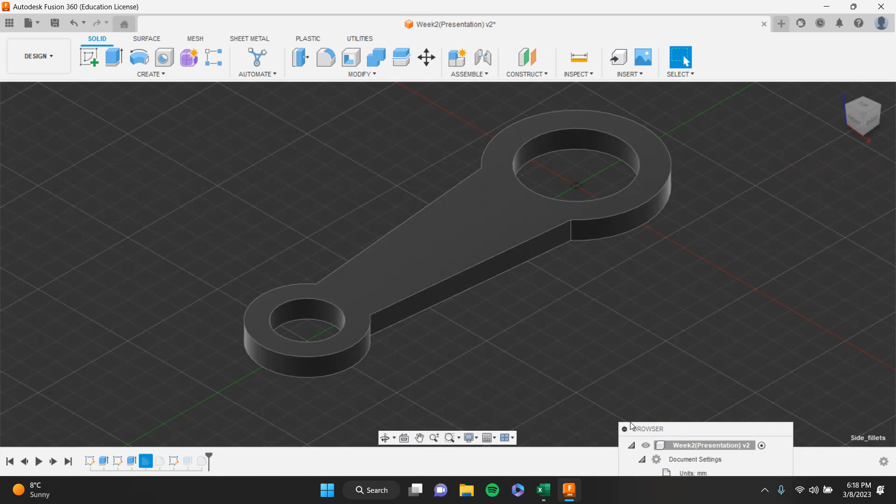Oh yeah, okay, actually let me get a bit more into detail with that, because there's a lot of different errors you guys could get. Sorry, how do I do that?

Yeah, yeah, go back there. Nice, okay, so right now it's at green, right? So we're ready to solve, like we've set our study up, right? One error we could have is by deleting the constraint.

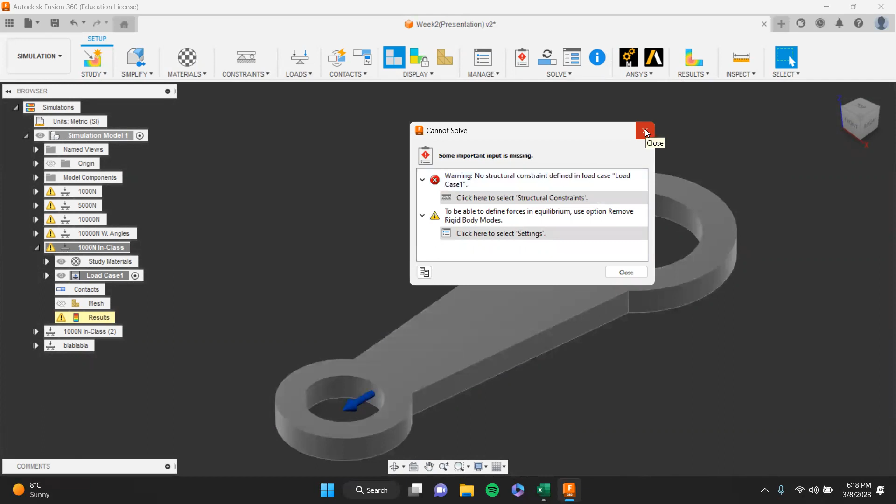And now if we take this grid off, there's nothing holding our model down to the ground. So applying this load that basically pushes it, nothing's gonna happen, right? Our model's just gonna get pushed along and nothing's happening. So that's the first one. Fusion's telling us, hey, there's no structural constraint here, like we can't analyze anything, nothing's gonna happen. Our part's just gonna move. So that's the first one.

Second one is if we delete this. How do I delete this? Make this 0.

So if you guys want to delete your loads, it's over here. I'm gonna suppress it—this is another type of error you guys can get. So there's no load. Fusion's telling us like, yes, our part's fixed to the ground now, but nothing's happening to it again, so there's nothing to analyze here.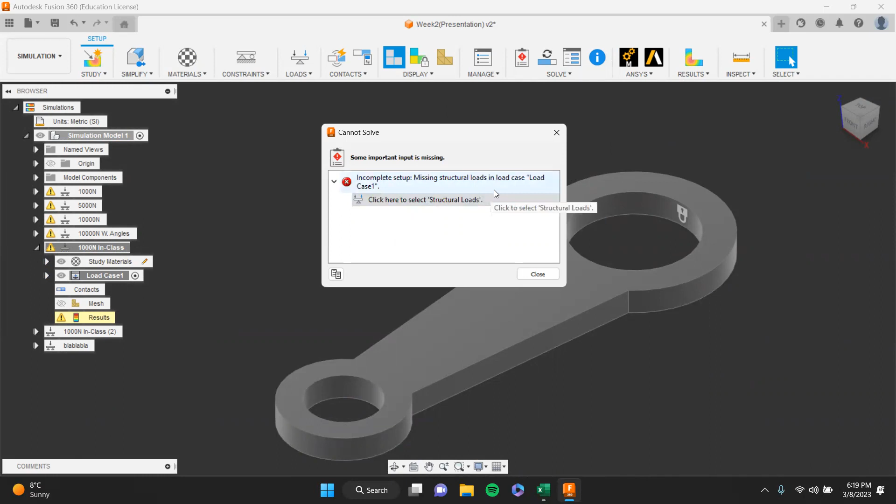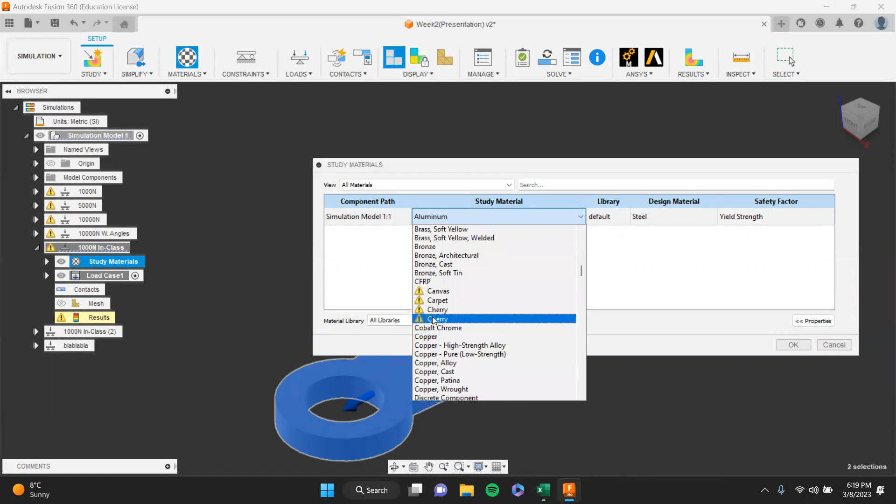Another type of error you guys can get is... there's a lot of different materials within the Fusion library. You guys can see some of them have warnings next to them. A lot of these are non-linear materials, like a lot of wood. If we try to pick a wood, let's say we go for a cherry, hit OK here, Fusion's gonna hit us with another error, telling us we can't analyze wood because it's non-linear. So that's three of the different errors you guys can get. There's a lot more, but those are the most common ones.

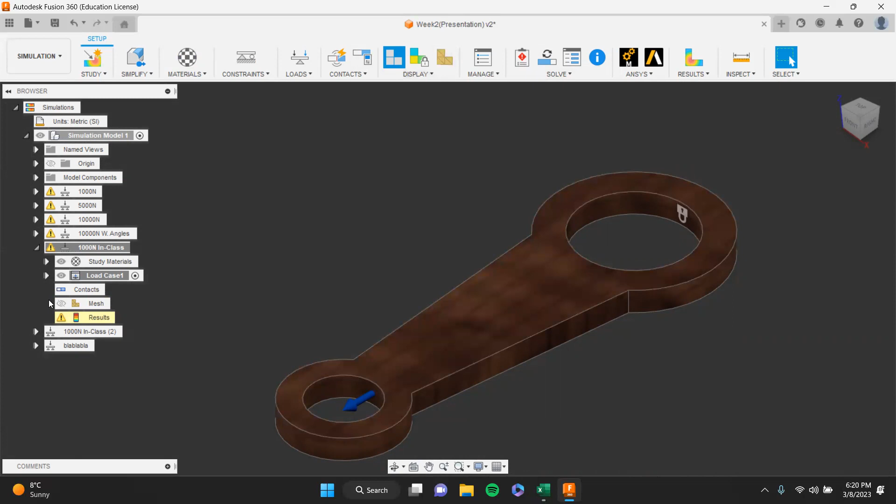Yeah, for sure. Let me just change my material back to aluminum.

So for mesh, there's two ways you could go about it. First is right here—hover over that and a pencil icon should appear. Click edit, that brings you here. Another way you guys can do it is go up to settings, and right below general is mesh. Same exact interface, same exact thing you guys will be seeing. We'll be exploring the advanced settings next week, but for right now, we just want to keep the 10% model-based size and hover over the arrow—that's how you guys can see what value you're at.

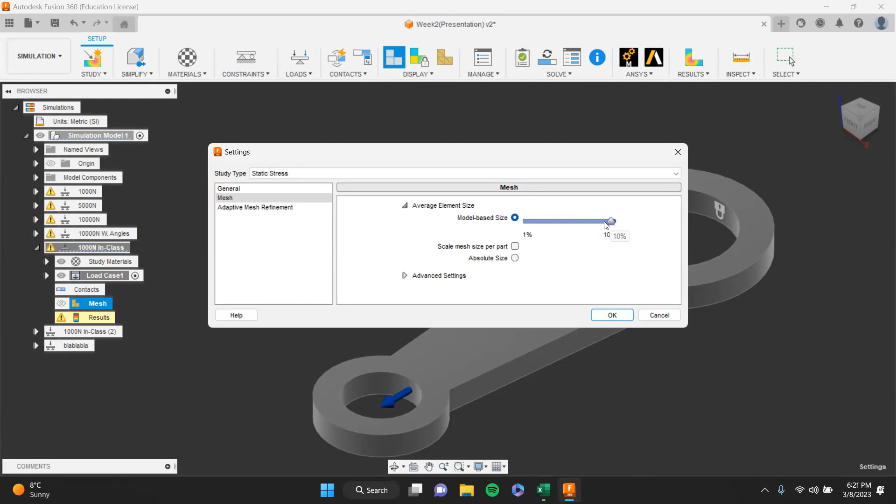One thing I want to show you guys is why exactly I have these out-of-date results. So if we change something within our design here, say I unsuppress this feature here. If I go back to simulation... over here, sorry, give me a sec. Let me save this. Cool.

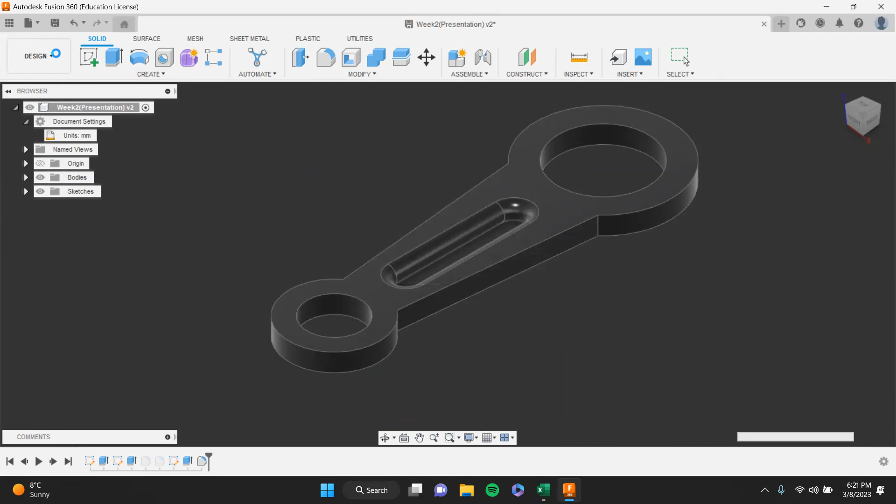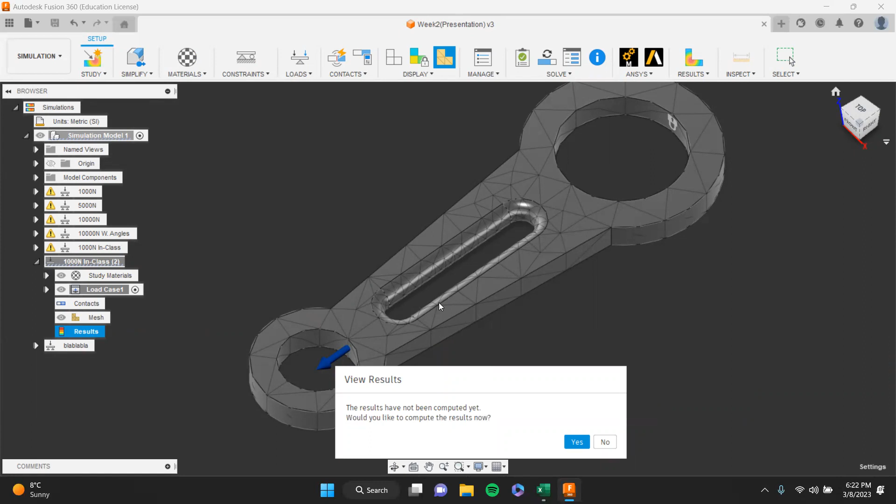If I go to simulation, it will say wait, it's out of date. So every time you guys see a warning here, it's basically Fusion telling you that you did something to the part, and now Fusion has to run the tests again to get an accurate result. So if I generate this mesh, and let's see if we can go back to results—yes, because we changed the part, if you initially had this feature suppressed and you guys decided to unsuppress it and go back to view your results, Fusion's gonna hit you with this error saying we haven't done this yet, even though you might have ran the study earlier. That's because you unsuppressed this feature, and now it's a whole different model. Fusion has to run it again because it has to take into account this hole now. But yeah, that's one reason why you would have a warning here, like I do.

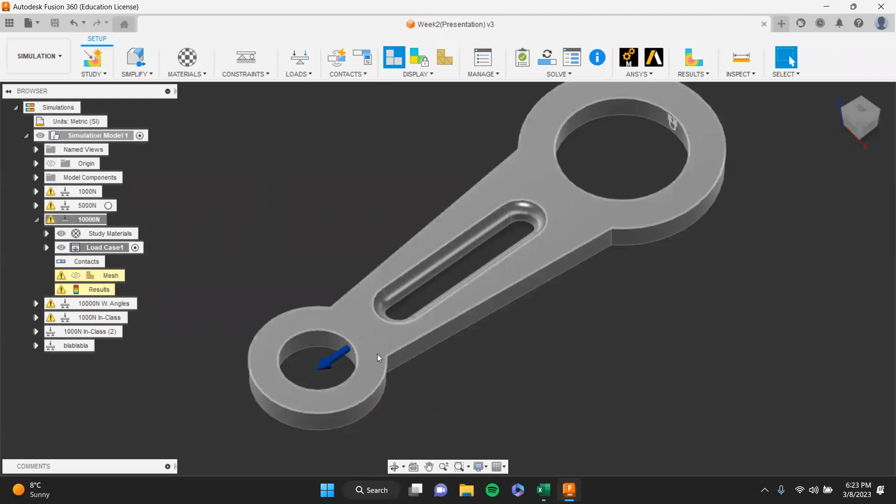That's completely up to you guys. If you guys did the 1000 newtons without this being unsuppressed, then if you want to go along with it, we don't mind—it's completely up to you guys.

For this week, we're gonna ask you guys to stick with 1000, 5000, and 10,000. Oh yes, most definitely. But for this one, we're just gonna ask you guys for one. Most definitely, if you guys are just doing your own studies, you can have more than one of course.

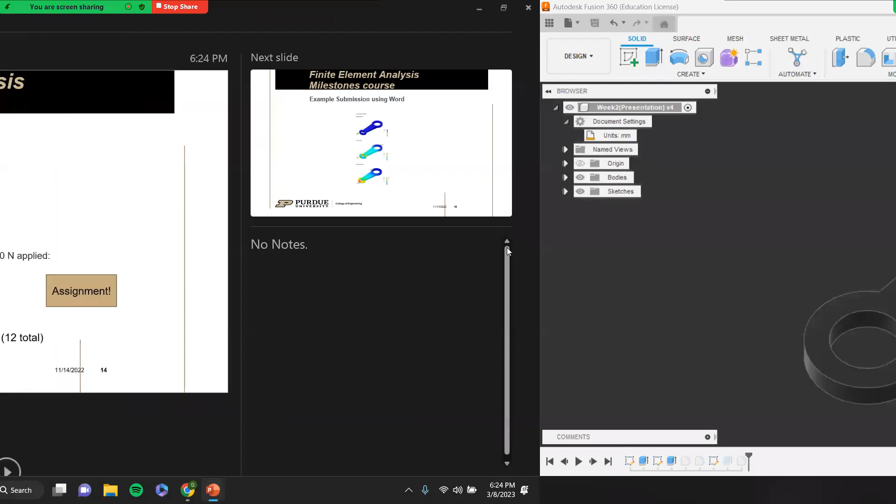Oh okay, let's try that out. Create a new study here. Did you have the first load here? As usual? Cool. Whatever.

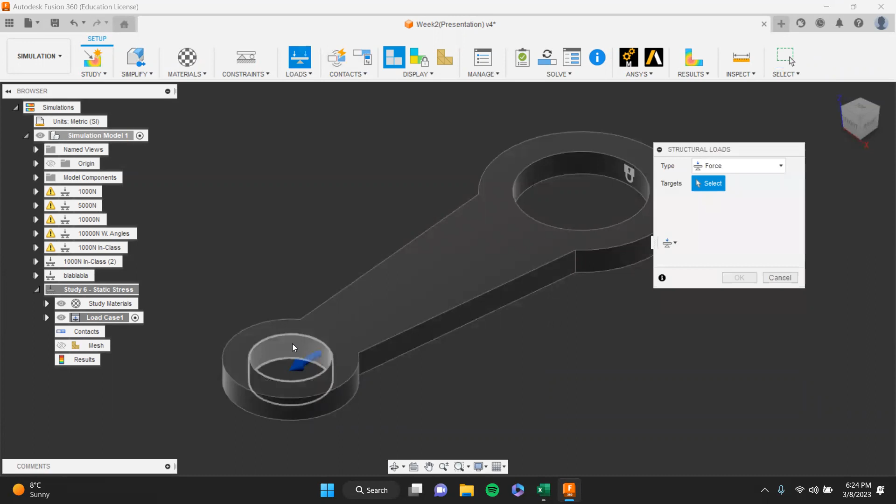Oh I see, did you try it again, like over here? I believe it should work if we go on any other part. Let's say we have another load here—that's 100, we should have it.

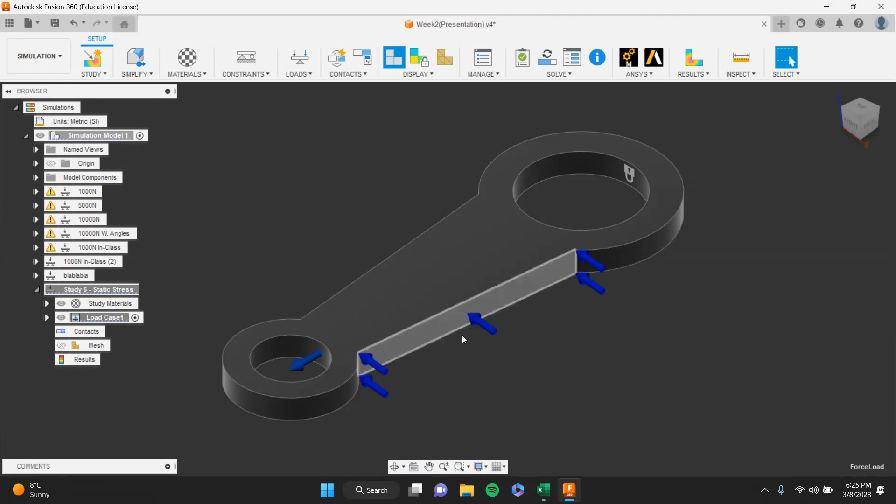If you guys can see here, there's a lot more arrows on this new load that I put than there is here. By default, it's usually a distributed load that Fusion applies, that's why there's a lot of arrows here. It's just telling us that we're applying this load in all these areas. There's a lot more, but it's just a general overview—that's basically how Fusion does things.